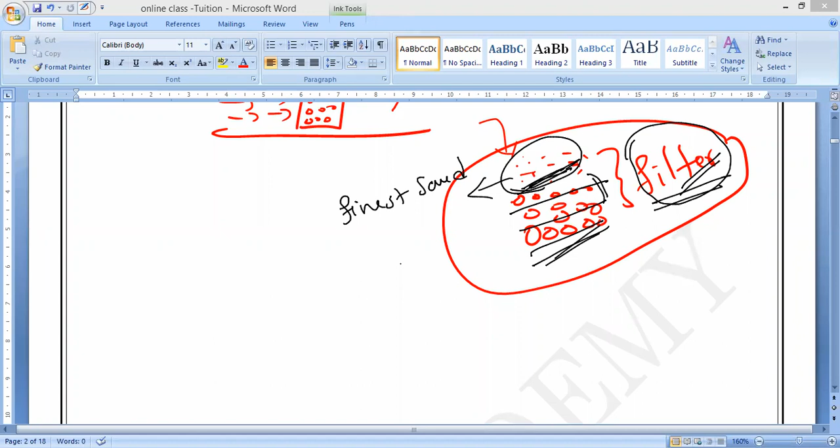Various purposes. Now, let us go for supply of drinking water in a city. Supply of drinking water.

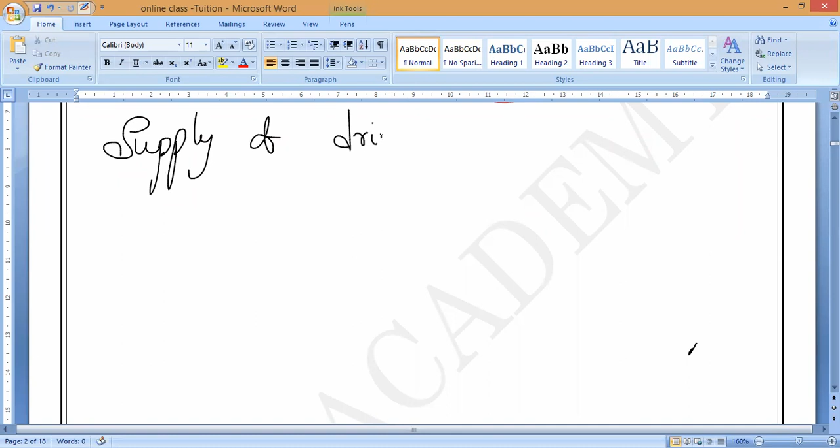Drinking water in city - not only city, nowadays even most normal Indian towns, the municipalities and corporations, everything they are doing this. For example, take your capital city, Chennai. Chennai has so many water reservoirs. Coming to Pudukkottai also, we can see so many water bodies which are the major source of water supply for Chennai.

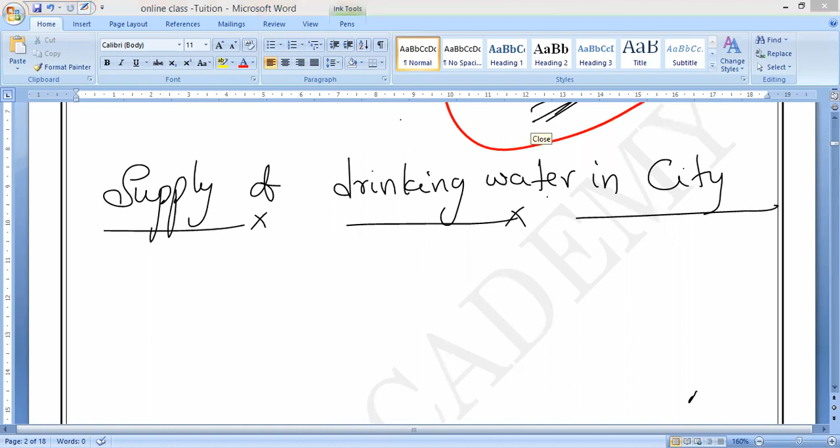The water present in this water body, people are not drinking directly because it contains so many impurities.

The water from a river or whatever water body, is pumped by the pumping station into a large reservoir. Understanding storage - reservoirs where the water is stored, or else from rivers. Suppose from the Kaveri river, you are pumping the water into a particular kind of pumping station with the help of a pump.

For example, I will show you a real example. Coming to Pudukkottai also, we can see that pumping station where water bodies are, somewhere some building they will construct. Have you seen it? Like I will show you, just imagine. In Tanjore also, if you go there, somewhere you can see mid of the water. One minute, I am not seeing the pictures.

Yeah, okay, I will show you. Wait. Yeah, I got it, I got it. Now observe very carefully this picture, then you can understand.

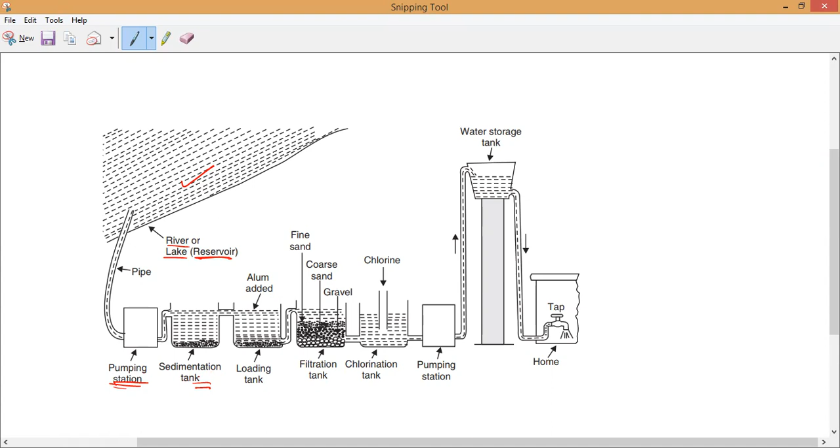Water which has been pumped with the help of a pumping station goes to the biggest storage tank, that is called the sedimentation tank.

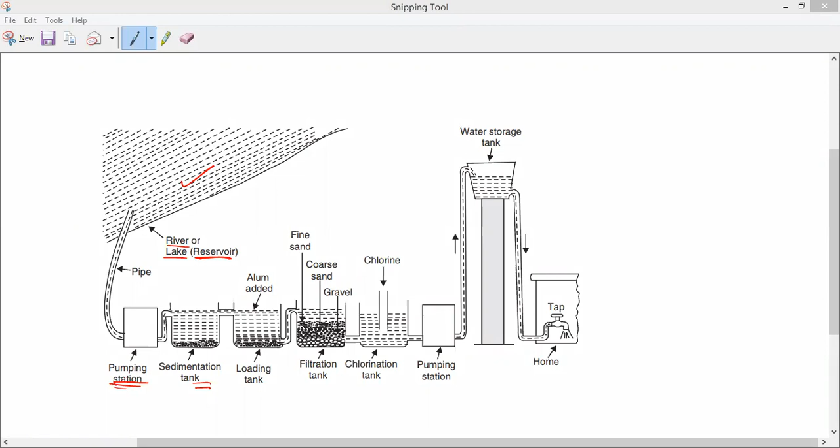So the water, once it is pumped into the sedimentation tank, is left undisturbed. They allow it to stand in the sedimentation tank for some time, like 1 hour, 2 hours, 3 hours, or even one day.

Now you can observe, if the water stands inside the sedimentation tank - basically, suppose I pour sand or some dust into a normal glass of water. If I leave it for 10-15 minutes, all the impurities, the big particles, will settle down. Is it yes or no, guys?

So without any extra work, just by pumping into this tank, all the biggest impurities - whatever solid particles are more dense than water - will be settled down at the sedimentation tank.

But still, some impurities are floating - substances which have equal density with water will float along with it. Some particles will settle down faster, but some particles will take very long to settle down.

Because the density is almost similar to the water density, they will continuously float only. So it will take a huge amount of time to filter, and we don't have that much time.

So what they will do is, all the big solid particles will be settled down, and that water - which is not yet pure water - will be sent to the next tank. That tank is called the loading tank.

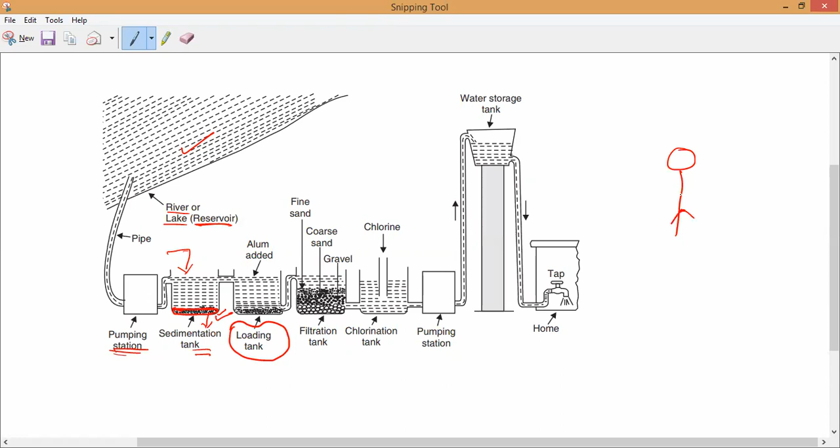Let us imagine now, for example, Mawanish is running alone. He can run a very long distance. Is it yes or no, guys? Mawanish is alone and running - he can run longer or not?

Nobody is responding. Mawanish alone is running - now can he run a longer distance or not? Now, suddenly, Pradosh will jump onto Mawanish. Then his speed will decrease, and he will travel less distance compared to before.

On the other side, if another fellow also jumps - suppose Maitreyan also jumps onto Mawanish - then Mawanish will fall down very faster. Is it yes or no? Will you accept it, guys?

Same way, here in the loading tank, what is happening is - what do you mean by loading? Some particles will never settle down much faster. Is it yes or no?

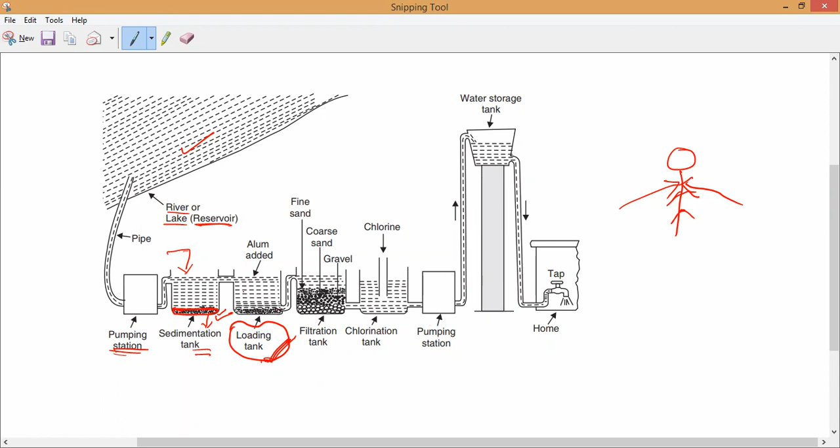So, because of this, to increase the sedimentation rate - meaning to settle down the impurities much faster - we are adding some chemical called alum.

Alum is some mixture of elements. So this alum, what it will do is act like Mawanish. Mawanish is the impurities which are floating in the water, and Pradosh and Maitreyan are like alum. They will jump on Mawanish, and Mawanish will fall down immediately.

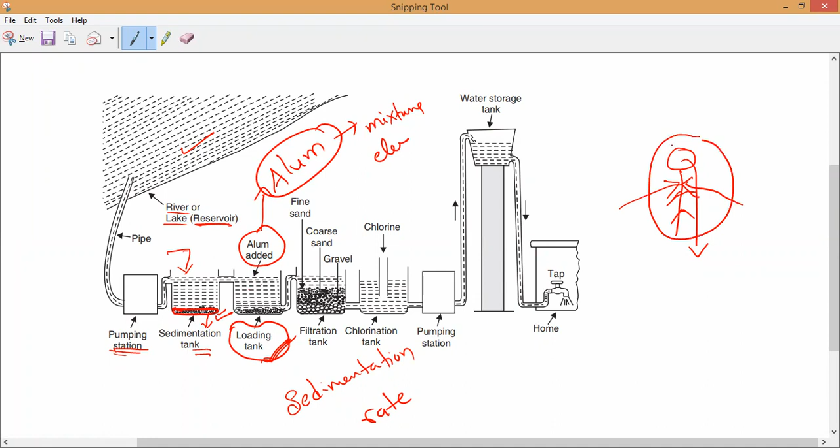Cannot move, same thing is happening here. Once you add the alum, the particle's mass will increase, so along with the alum, the impurities will settle down. Understand guys? That is called loading.

Water is sent to the loading tank. In the loading tank, some alum is added to the water. So the heavy particles of this dissolved alum deposit on the suspended clay particles floating inside the water, or any kind of suspended particles, and they will increase the load. Mass increases so that they become heavy and settle down at the bottom of the tank. Do you understand, guys?

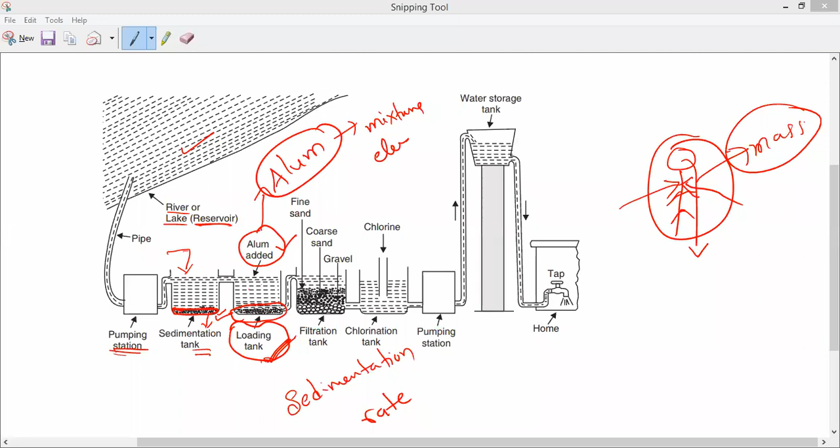By using this alum, if you remove the suspended clay particles, that is called loading. What should we call that process? That process is called loading. Some small impurities, like sand particles or clay particles, are floating inside that water. By using alum, we are separating them, making them settle down, and removing them. That process is called loading.

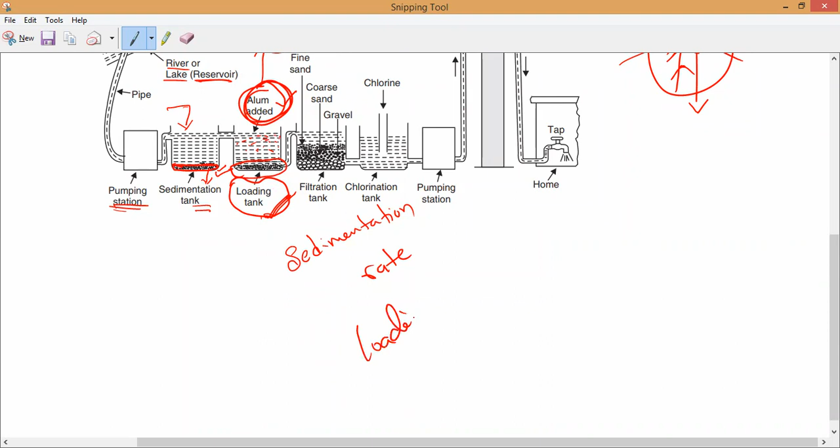What will we do? We call it loading by using alum. We are removing the impurities. That is called loading. What should we call it? Loading. Understand? Loading, yes or no? Yes, sir.

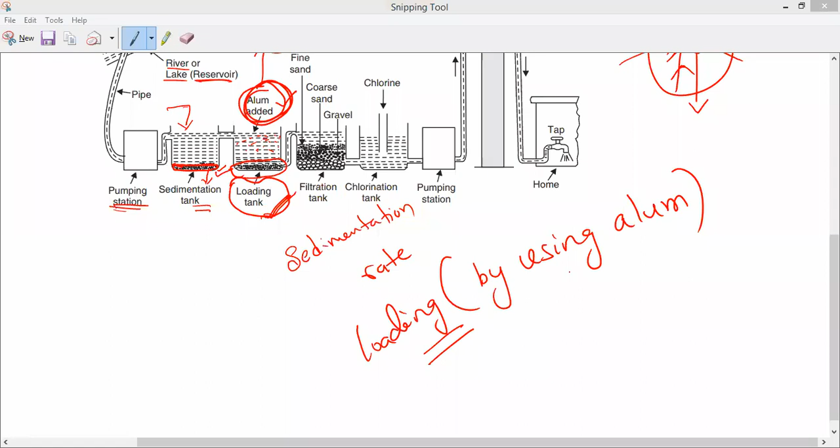Still, impurities will be there. The most minute particles will be there. Those particles are also very dangerous, and some bacteria and virus will be present too. Even microbacteria are there, and that should also be filtered. That is why we pass the water after this loading tank.

Most of the solid impurities are filtered. Now minute impurities remain, that's why we pass the water through the filtration tank. What is that? Filtration tank. Now, this filtration tank, as I have already taught you, is made up of three different layers.

What are the three different layers? Can you say? First one is fine sand. Next one is coarse sand. Means coarse sand and gravel. Gravel means like you can use coal or big stones.

If you pass the water from the loading tank to this filtration tank, we know these three layers are fine sand, coarse sand, and gravel. Remember this order: fine sand, coarse sand, gravel. Now, is the water coming from up or down? Water is coming from up, from the loading tank. That is why fine sand is in the top layer.

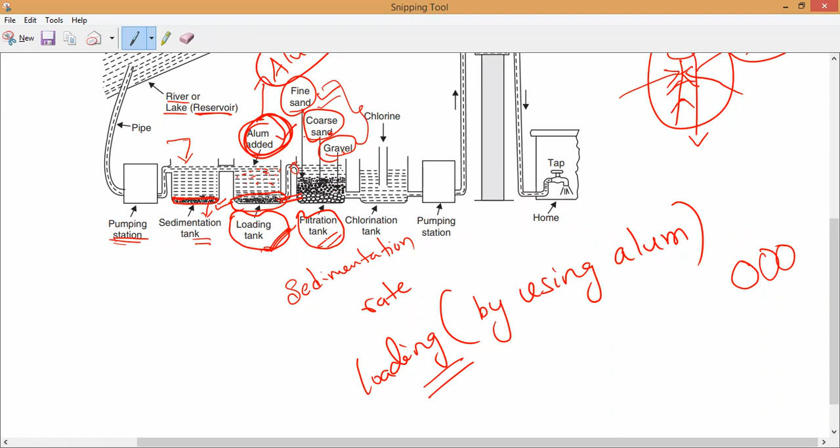So these three different layers form a triple layer filter, so that most of the bacteria also will be captured or filtered in this layer. That is what we call the filtration tank. If you want, you can draw the filtration tank.

Now you can see still some water is having bad smell. Some water is still having some kind of microbacteria which can pass through that fine sand too. These also cause diseases, so we have to kill them. That is why we send it to another tank called the chlorination tank.

In the chlorination tank, we pass chlorine gas. As we know, chlorine gas will kill germs and bacteria. It will kill bacteria and remove the bad smell of the water. So that is the filtered water. At this stage, finally, in the chlorination tank, by using chlorine gas, we kill the bacteria, and that water is called chlorinated water.

Chlorination. That is called as the chlorination tank. What is it called? Chlorination tank.

Now, at present, there are many techniques to kill bacteria. Not just chlorine, we also use UV light, understanding ultraviolet filtration. Next time you purchase a water bottle at the bus station or railway station, check it. They write ultraviolet filtration, reverse osmosis. Have you noticed it? Reverse osmosis, and also ozonated filtration. So different kinds of filtration techniques are being used nowadays. These are even more cost effective and more effective methods.

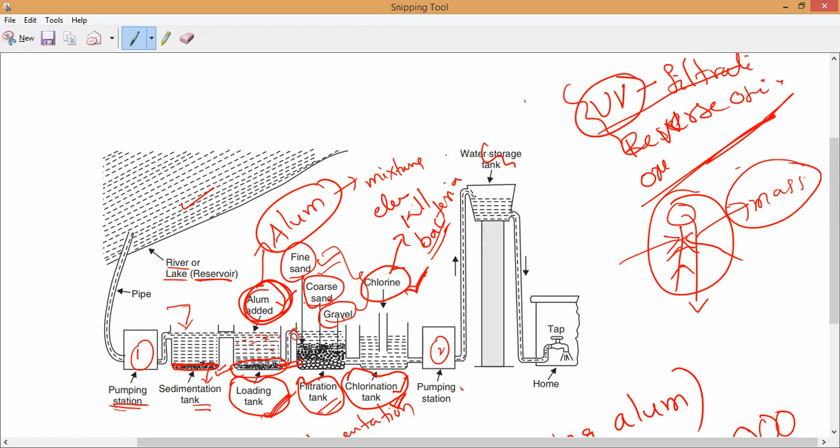With the help of this pumping station, it is sent to the water storage tank. In villages, this water storage will be there. Have you noticed the water tanks? So the water will be pumped to the water storage tank. If you go to the city, very big tanks will be there.

From there, each and every area, each and every house in our home is connected to tap water. The tap connected from this water storage tank reaches our home. That is what we call drinking water. Like this, many processes take place when water reaches from the source, like reservoirs, rivers or lakes, to our home.

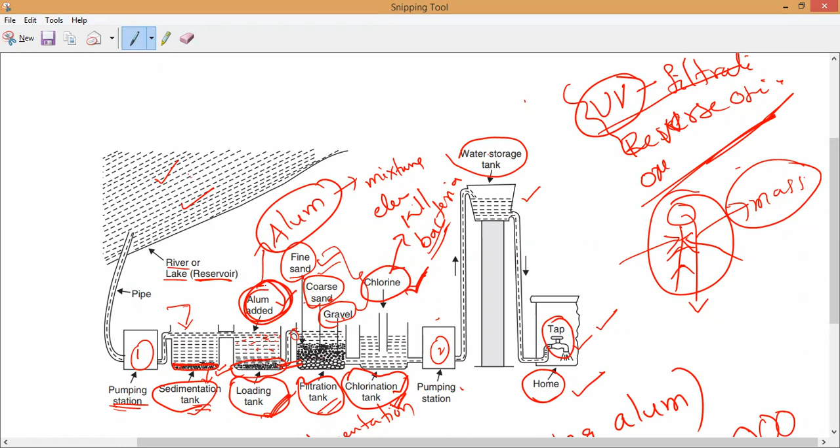So these many processes take place. First is the sedimentation tank, where water is left undisturbed so most of the big particles settle down automatically. Later, the loading tank, where alum is added. Alum is a mixture of elements which increases the mass of the particles, making impurities heavy so they settle down.

Later, the water passes through the filtration tank, which has a triple layer: fine sand, coarse sand, and gravel, which removes most of the bacteria and viruses. Later, some microbacteria will still be there, so to kill that, we pass chlorine gas. That tank is called the chlorination tank.

So after chlorination, it is pumped with the help of pumping stations to the water storage tank. From this water storage tank, we have connections to each and every home in our cities, and even in villages nowadays, most of which have started this process. This is what we can call filtration of water.

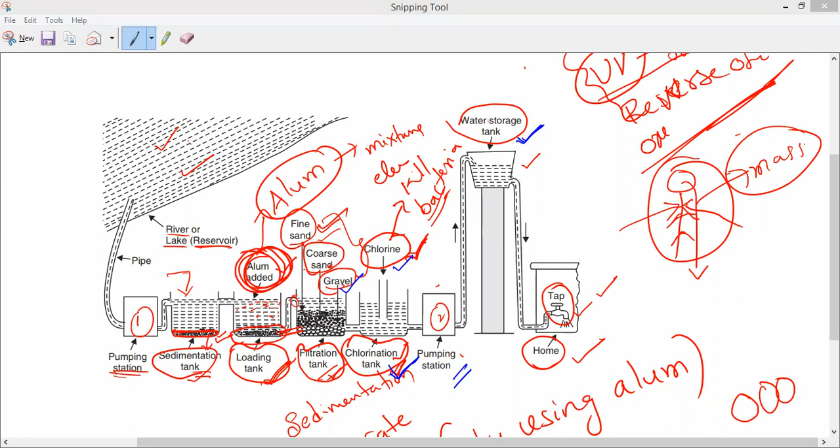What can we call this process? Filtration of water. The exact name for this process is supply of drinking water in a city. So for getting safe water for drinking, we do these many processes. This is what we should call removing insoluble solid impurities from the liquid.

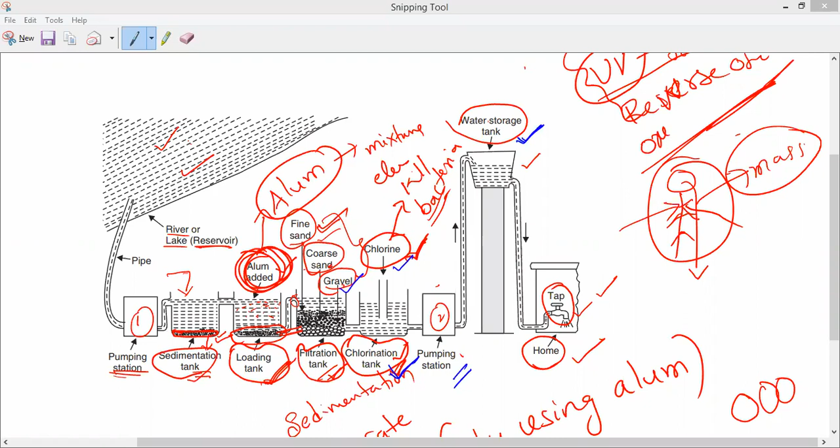With this, I will stop today's class. In the next class we will study the second method, called separation by centrifugation. This is the first method, called filtration. So with this, I will stop today's class. I hope you all understand filtration very well.